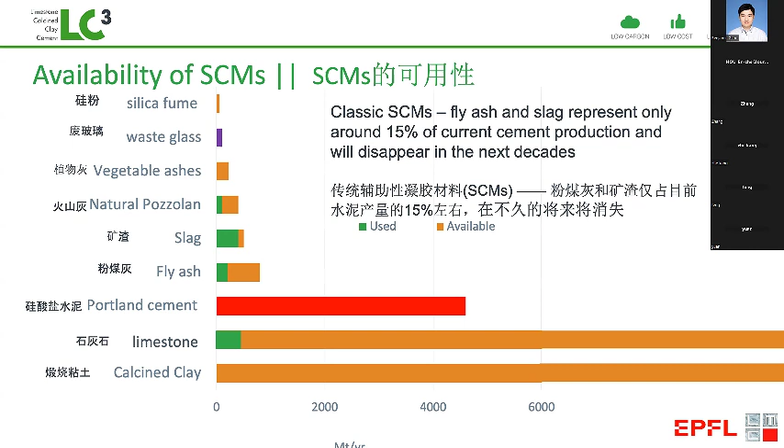What other materials do we have? Well, we have a lot of limestone, which is already used as a substitute material, but we cannot substitute more than about 10% of this without losing the properties. And then when we look at other materials, people have worked on things like waste glass, vegetable ashes, but the amounts of these available are really in very short supply. The only thing we have which is available in the quantities required are clays, which can be calcined, that's to say heated in the range 800 degrees when they become very reactive materials.

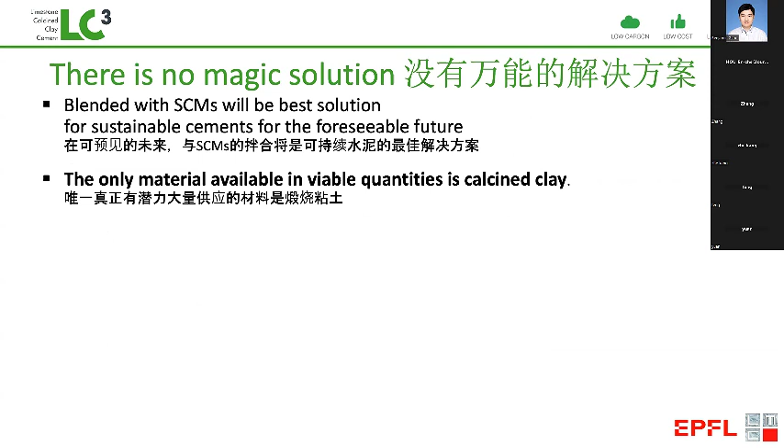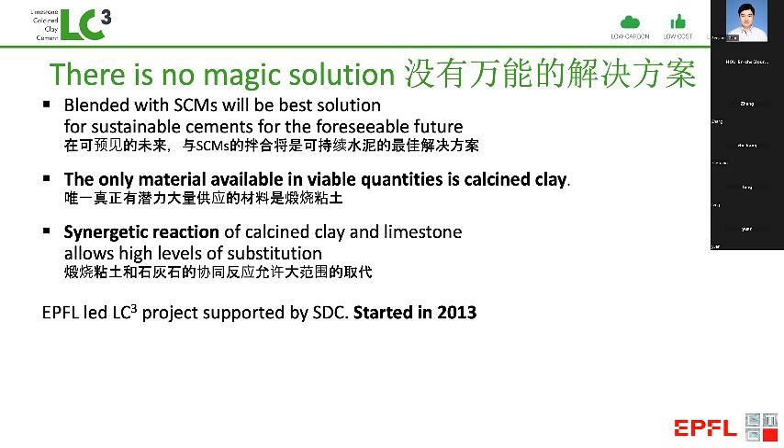So in summary, there is no magic solution. Blended cements with supplementary cementitious materials would be the best solution for the future. The only material available in viable quantities is calcined clay. And what we discovered, which is behind this LC3 technology, is the synergetic reaction of calcined clay and limestone allows you to go to very high levels of substitution. And this is the essential idea behind the LC3 project, which we started in 2013 and has been supported for the last 8 years by the Swiss government through their Agency for Development and Cooperation.

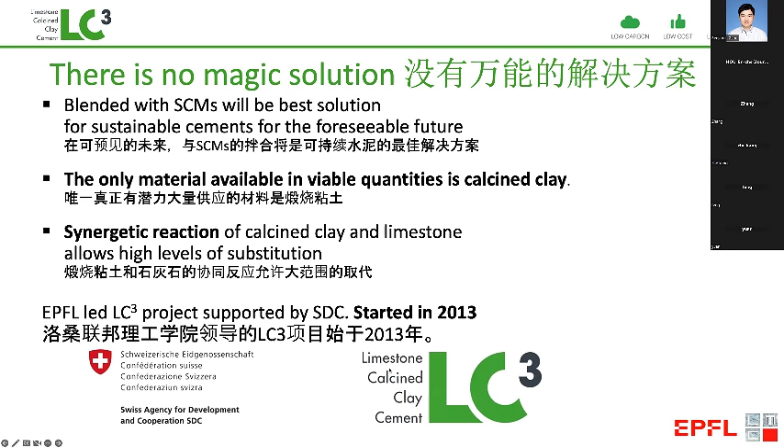And LC3 simply identifies what are the ingredients we have in this cement. It stands for limestone calcined clay cement. So why does this have lower CO2 emissions? Well, in conventional Portland cement, we have about 95% clinker, which is emitting the CO2. In LC3, we have only 50% clinker. And in fact, we can go to even lower amounts in the long term. We have 30% calcined clay, which has a little bit of CO2 from the calcination process, but this is much, much lower than for clinker. And limestone has virtually no CO2, only a very small energy for grinding is needed.

However, even at this level of substitution of 50%, we can have materials which can exceed the strength of the reference in only a few days. And this is in very sharp contrast to traditional SCMs like fly ash, where we may have to wait 90 days to recover the same strength as the reference. With LC3, we can do this in 3 to 7 days. So simply put, this is 50% less clinker, 40% or more less CO2 with similar strength and some properties like chloride resistance and resistance to alkali silica reaction are vastly improved.

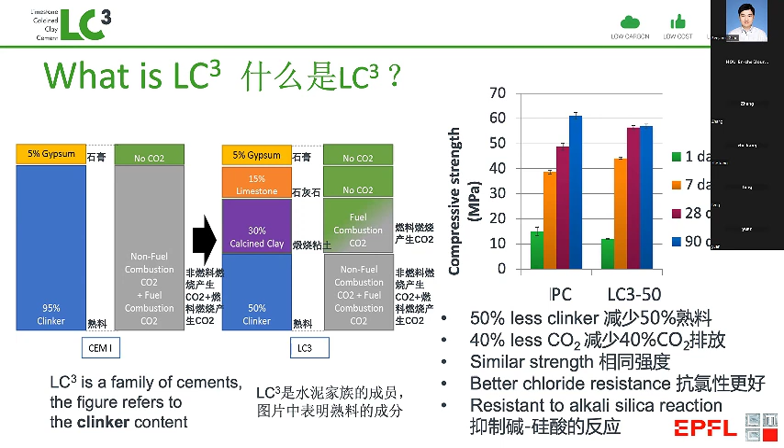Now, the first question is to look at what kind of clays are suitable. We need to have a certain amount of this mineral kaolinite. So this kaolin type clay is what's called a 1-to-1 clay, which means it has one layer of silicates and one layer of aluminates. And when it's calcined, that's to say heated to 800 degrees, this structure becomes disrupted and both the silica and alumina are available to react.

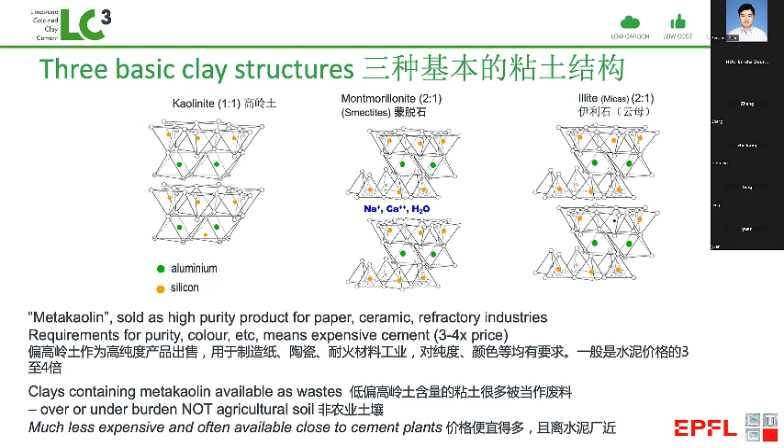Now, we don't need high-level metakaolin. This is very important because when people look at reserves, then they are talking about very high purity materials. We only need around 30 to 40% of this mineral kaolinite. And the reserves of these kind of clays are many, many orders of magnitude higher than those for pure metakaolin, maybe 1,000 times or even more. And these are often wastes which are over or underburden, results of tailings from other mining operations, etc., which can be reused. So we have now tested more than 70 clays from around the world.

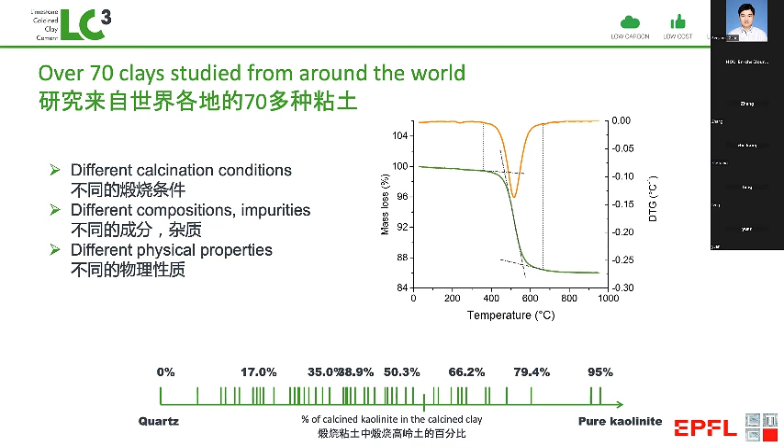We can measure the kaolinite content quite easily by looking at this weight loss step in the range 400 to 600 degrees. And when we look at the strength development, we can see that this kaolin content is the overwhelming parameter controlling strength.

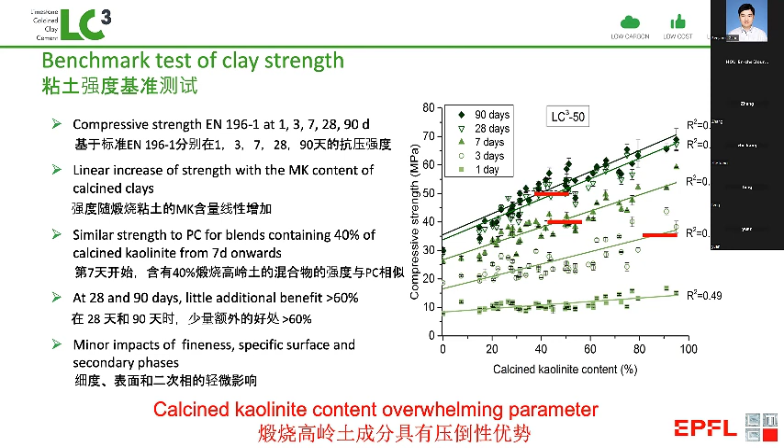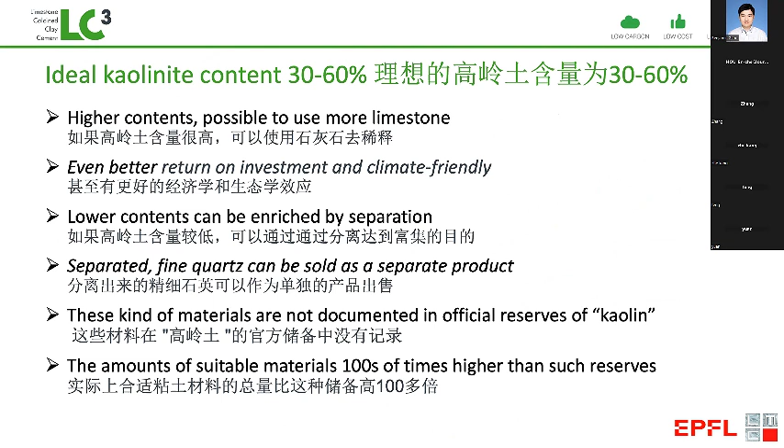We can see that at 7 and 28 days, we only need about 40% kaolin content, and some of these clays, even with 30%, are really doing very well. Now these kinds of clays are very abundant. As I say, we only need 30 to 60%. If you have more, you can use more limestone. If you have less, you can enrich by separation.

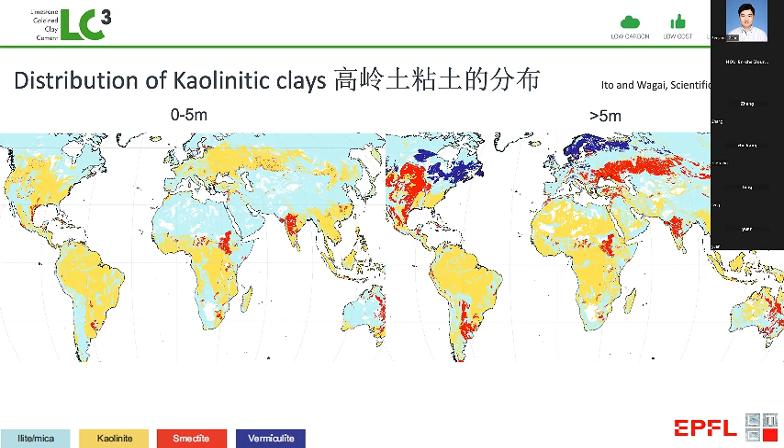This is the distribution of kaolinitic clays. Everywhere we see this orangey yellow color, we will have very suitable clays. And we can see in China, certainly in the southern part, these are very abundant. And even in areas which do not look so promising, like for example in Egypt, where we have worked a lot, we have been able to find very good clays. So this color gives you a first indication, but there are also clays in many other places. This is very important.

Now you can use these calcined clays in two ways. You have to find the clay, you have to process it, and then you have to calcine. And then you can either blend all the ingredients together, the calcined clay with the clinker, the limestone, and the gypsum, and this is what we call LC3.

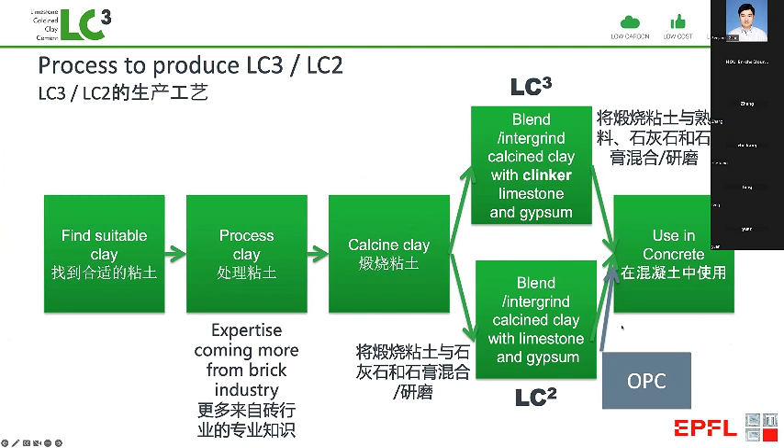Or you can make an additive. You can add at the concrete level, where you intergrind the calcined clay, limestone, and gypsum, and then you add to OPC, and you use in concrete.

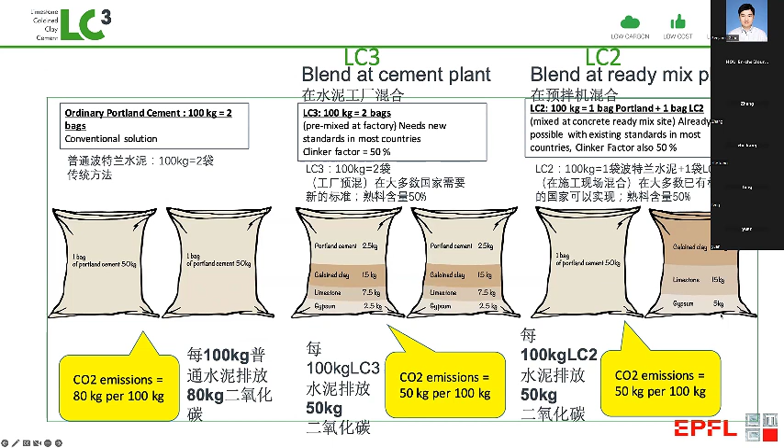And this slide just shows the same thing in another way. You either grind everything together to make LC3, or you take 1 bag of Portland cement and 1 bag of LC2 to make, again, the same composition.

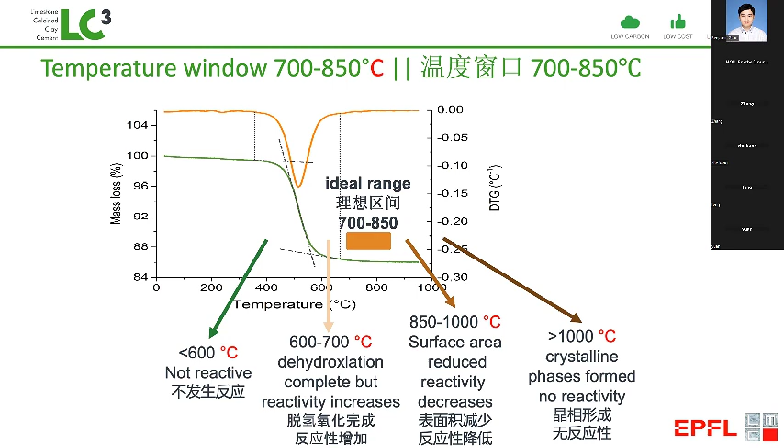And to do this processing, you can use rotary kiln, you can use flash calcination. Both have different advantages and disadvantages, but we see really very negligible impact on reactivity. And you can even adapt an existing clinker kiln.

So we know in China you have a lot of old kilns. These can easily be adapted to calcining clay rather than having to be demolished, which is, of course, the waste of resources. We have even been able to make calcined clay in a clinker kiln only 6 hours after stopping production of clinker. But of course, in the long term, it's better to adapt the burner to have lower temperatures.

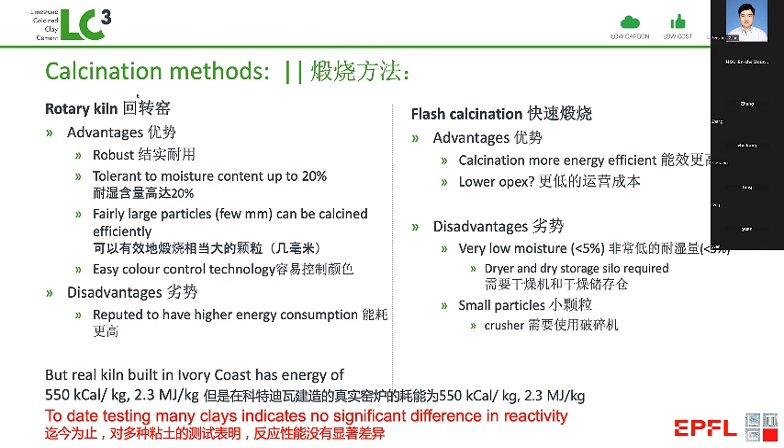So this is something we have really proved in a full scale. The first industrial production we made was in Cuba. And here we could make concrete blocks, which is a very commonly used building material. And these blocks could be produced in the factory in exactly the same way, with no need to retrain the workers in the factory.

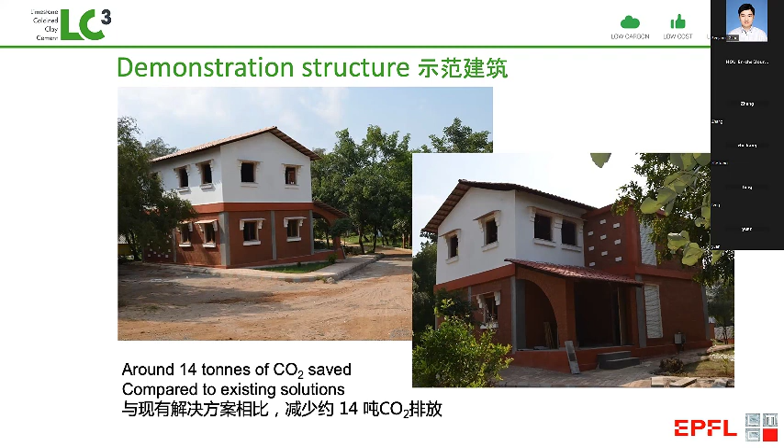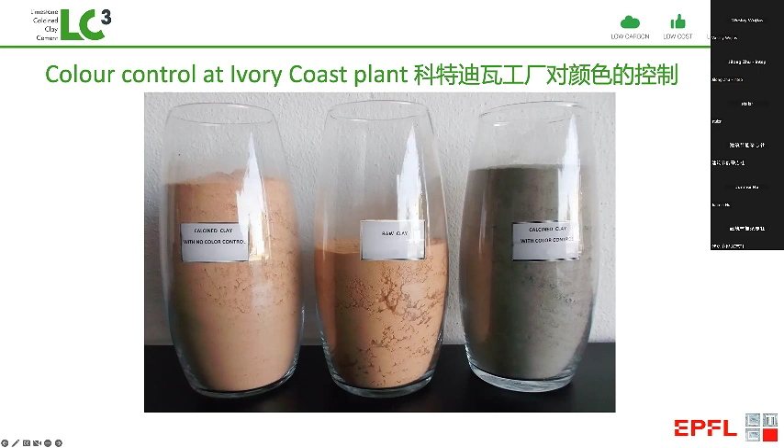So many people know that clays often have a red color. This is coming from the iron oxide, which is also present in the clay. And with a very simple technology, which is coming from the brick industry, you can control this color to make a gray like people are more used to for cements.

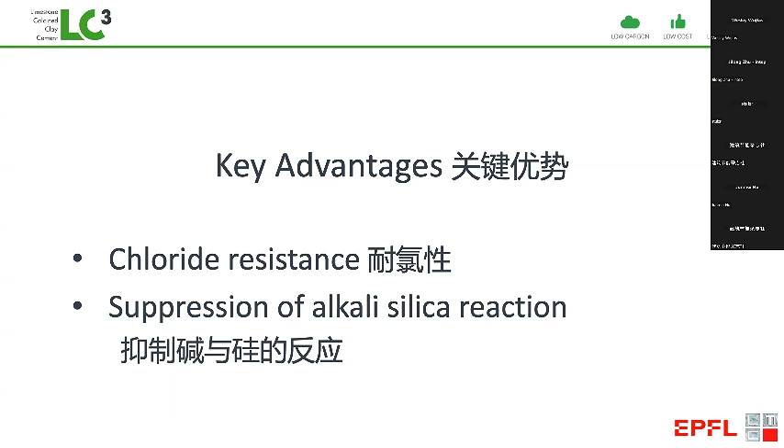So just to talk briefly about some of the key advantages, we have much improvement of chloride resistance and total suppression of alkali silica reaction. So looking at the chloride resistance, this shows a comparison of different materials. The black line is the reference pure Portland cement. And you see after only 6 months, the chloride penetration is about 40 millimeters.

When we have different blends with slag, this is improved, and blends with fly ash, this is improved still more. But by far the best performance we see with the blend of calcined clay and limestone, which is this solid purple line here. And when we calculate the diffusion coefficient, we can see it is 10 times less than for the reference. So we have a 10 times improvement of performance.

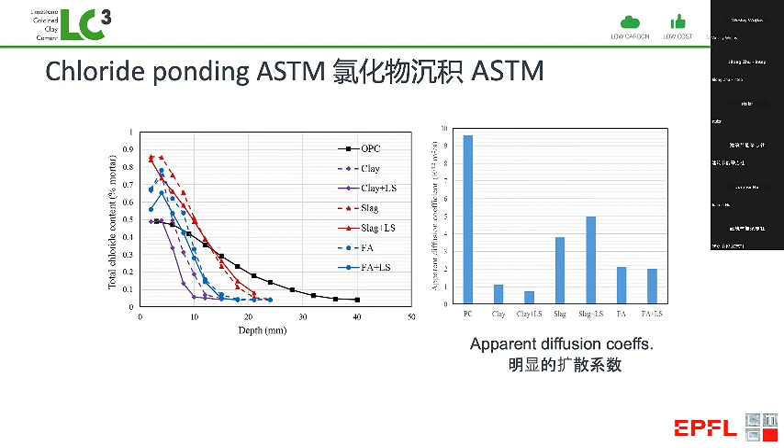The workability may be an issue because clays are very fine, but good properties can be controlled by admixtures, which are products already on the market. Many admixture manufacturers now produce special admixtures for calcined clay blends, which work extremely well. In fact, you can have real advantages, particularly in self-compacting concrete.

In self-compacting concrete, you need fluidity, but you also need good cohesion. And this good cohesion is brought by the clays, as you see here. Very good cohesion, no segregation.

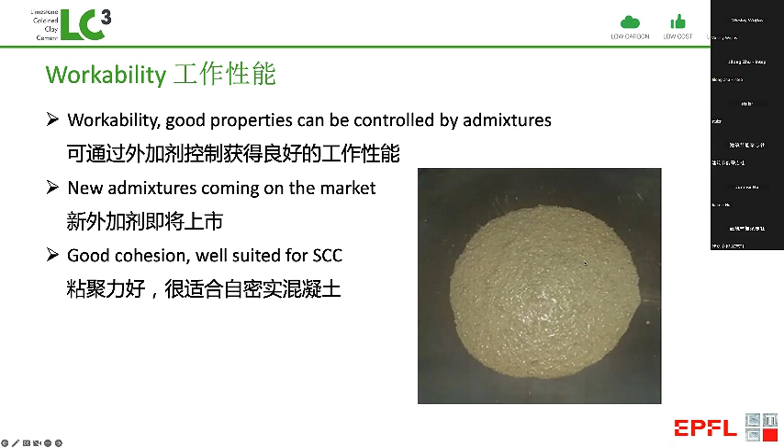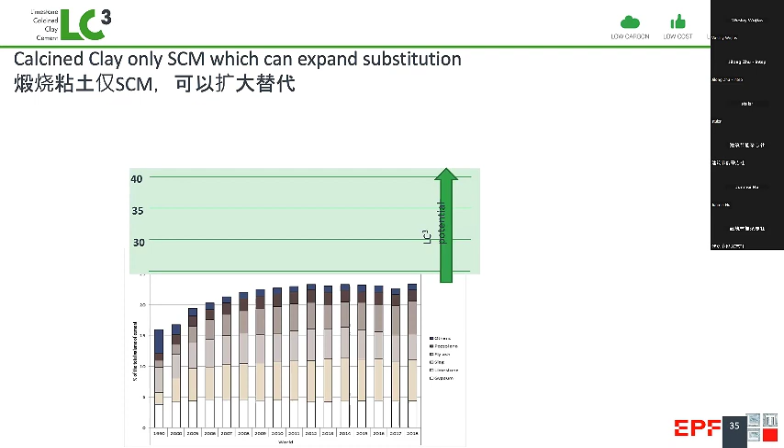So what is the potential of this technology? This graph shows the average level of substitution around the world, and you can see that in the last 10 to 15 years, this has stagnated at only around 20%. This is due to the limitation on the availability of slag and fly ash. If we remove this limitation, which is very easy to do given the abundant availability of calcined clay, we can easily imagine going to an average substitution level of, for example, 40%. On a world scale, this would represent a saving of 400 million tons of CO2 per year.

And on a longer term horizon of 2050, I think we could easily go to a substitution of 55%, which would represent a saving of 800 million tons of CO2 per year. This is like 2% of the world emissions today. So this is a huge contribution from one single technology.

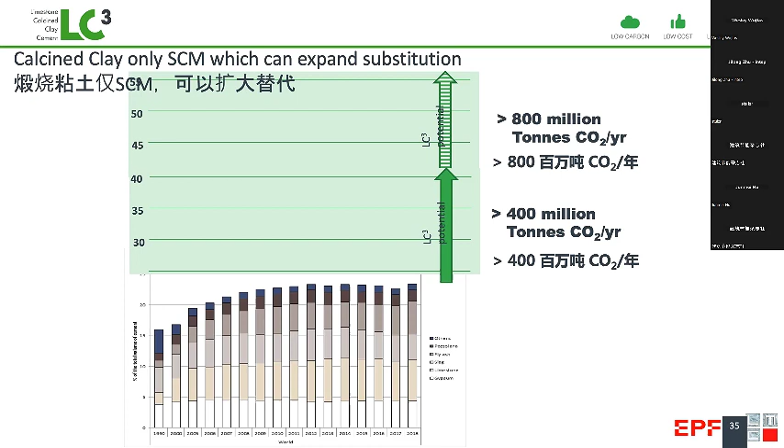On the financial side, we also have very good news, because calcined LC3 is generally cheaper to produce than the reference Portland cement. Even if you have to transport clay 200 kilometers from the plant, you can still save on your operating costs compared to OPC reference. A particularly good scenario is if you have a grinding plant in areas without limestone, so without good clinker production, you can really decrease your need to import clinker and get a very good material by using local clay. This calculation was made a few years ago, in 2019.

Since then, energy prices have increased enormously, and this increase means that the financial situation of LC3 is even more attractive today.

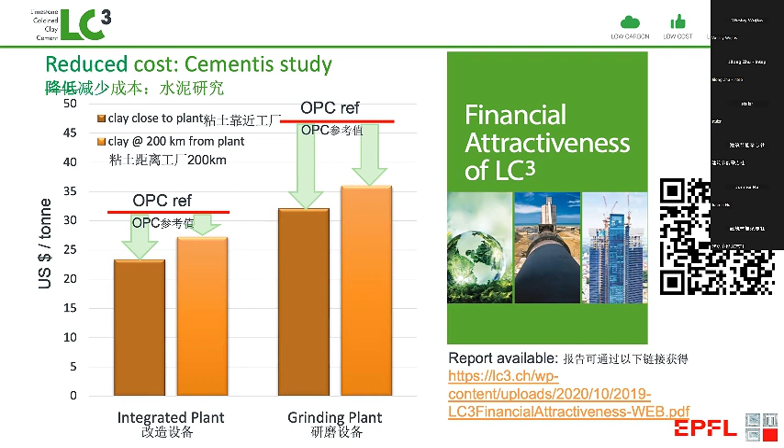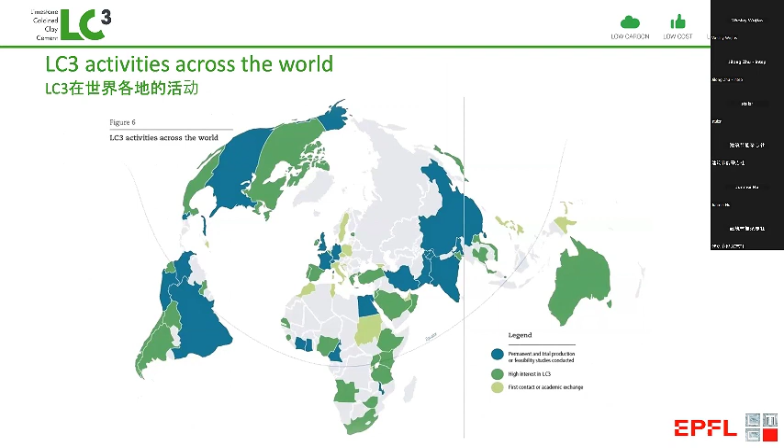So I'm pleased to say that at present, we're engaged with countries around the world, including China, and I think we really have huge potential with this technology. These show you some examples of plants which have been publicly announced around the world, in France, in the USA, in Ghana, in Colombia, in Angola. So you can really see that it's possible to produce this kind of material everywhere.

Before I finish, I want to emphasize that LC3 is one solution that can be used in combination with others. In a report we wrote for the European Climate Foundation, we calculated that if we combine the technologies we have, we can even reduce emissions by 80%.

So on the level of the clinker, we can reduce emissions from fossil fuels by using waste. On the level of the cement, we can use more supplementary cementitious materials like calcined clay. But we must also follow this through by reducing the cement in the concrete, and then reducing the concrete in the buildings. At all these levels, it has been demonstrated that it's possible to make very significant savings.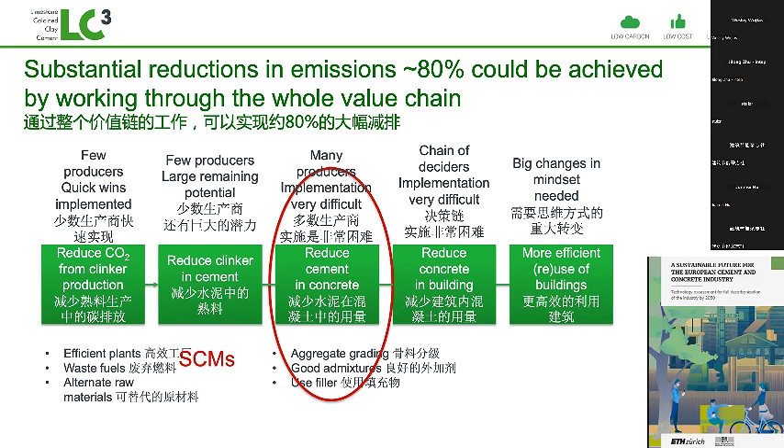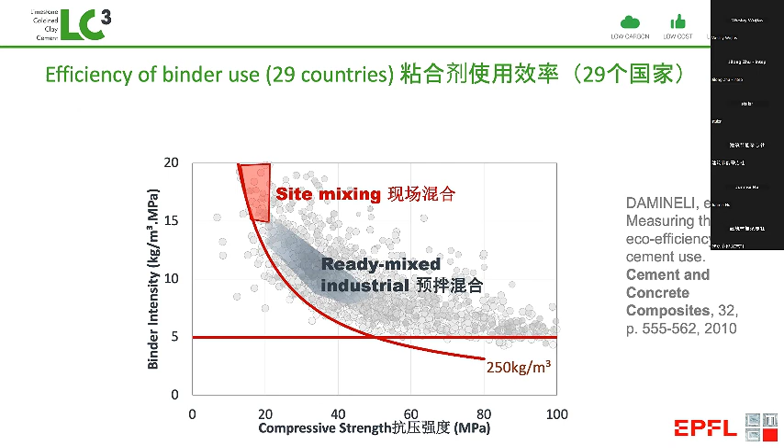So we can improve the efficiency of concrete by moving from site mixing to industrial production in ready-mix plants. This is important in parts of the world where much material is still mixed on site, but we really don't want to go in the reverse direction. This is what is happening with technologies like 3D printing, which take out the large aggregates. This increases the cement content and vastly increases CO2 emissions. So we really must be intelligent about solutions that take us in the right direction of reducing CO2.

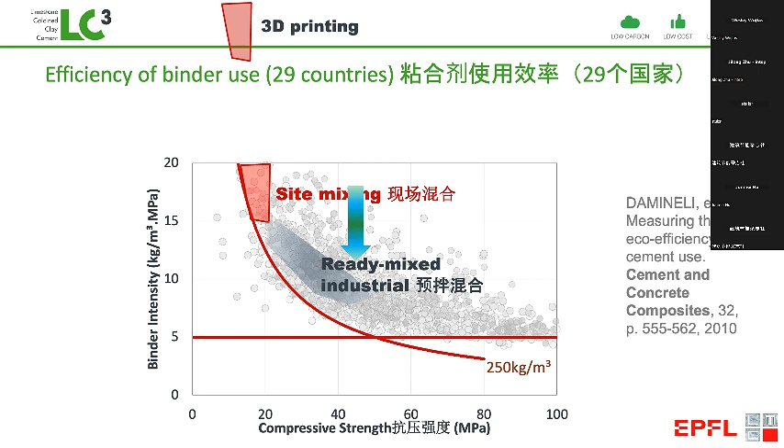And of course, if we want to make all these solutions work together, we really need to bring about a real revolution in the industry to get all the different sectors working together. This is what has been launched with what is called the Globe Consensus, which came from a conference in Tongji a few years ago.

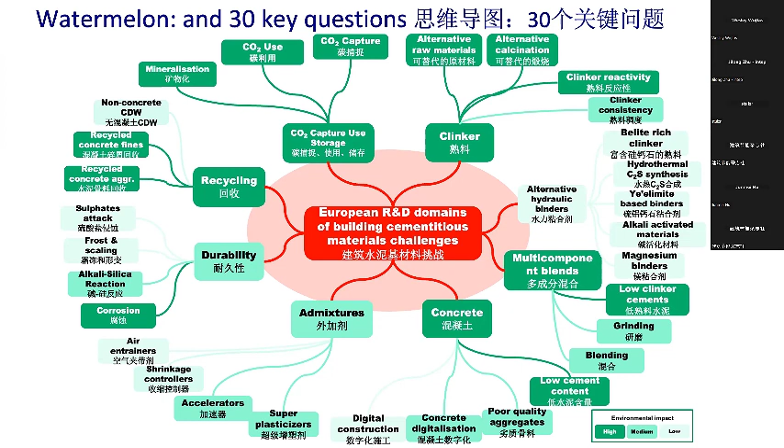Before I finish, I want to highlight a paper that will be published in RILEM Technical Letters very soon, written with my colleagues at Heidelberg Cement, Holcim, and Sika, where we look at all the different technologies and highlight their potential for CO2 reduction. The ones shown here in dark green have the highest potential to reduce CO2 on the time scale we're talking about, because it's no good having a wonder solution that's only available in 50 years' time.

To conclude, I hope I've convinced you that substantial reductions in CO2 associated with cement-based materials are possible. We must work at the cement level by increasing the substitution of SCMs, at the concrete level by minimizing cement contents, and at the structural level, where we systematically see over-design of about 20%, representing another possible source of saving.

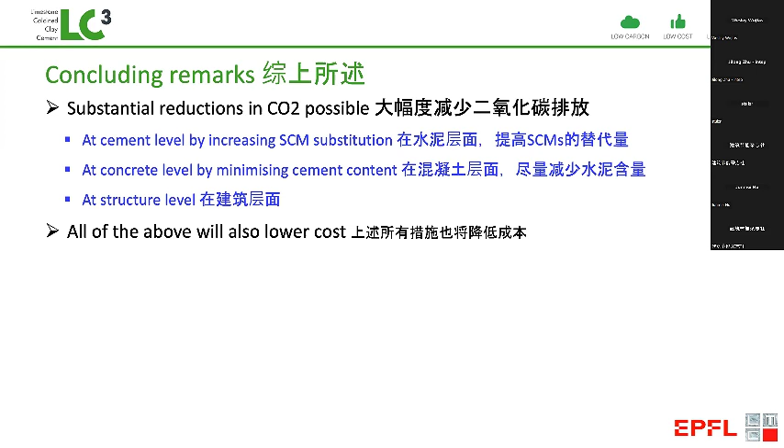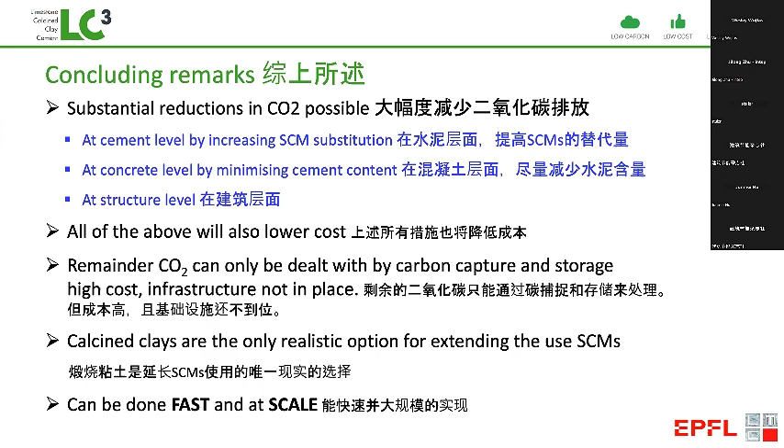All of these will actually lower cost, which is very good news. The remainder of CO2 we will have to deal with through technologies like carbon capture and storage, but these are very high cost and the infrastructure is not yet in place. At the level of SCMs, calcined clays are the only realistic option to scale up this technology. The main advantage is that it can be done today, it can be done fast, and it can be done on a very large scale.